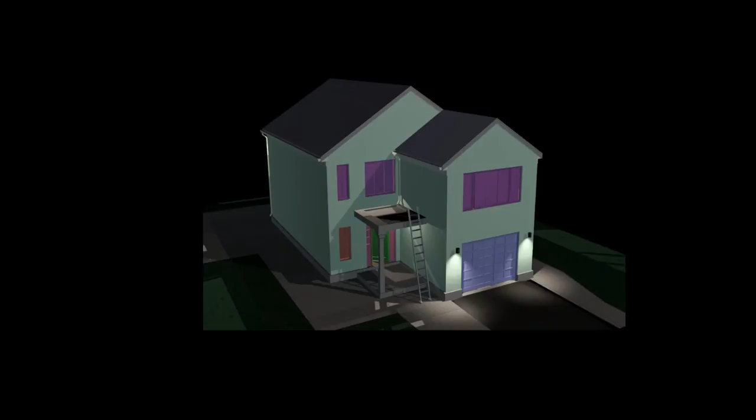Welcome to part 6 of this project. Here we'll do the exterior, the trim, and the gutters.

First, if you have done this with me before, you can hide the brick face and the vinyl siding, so you have only these rafters or the drawings we made previously to create the roof line. So what I'm going to do here is...

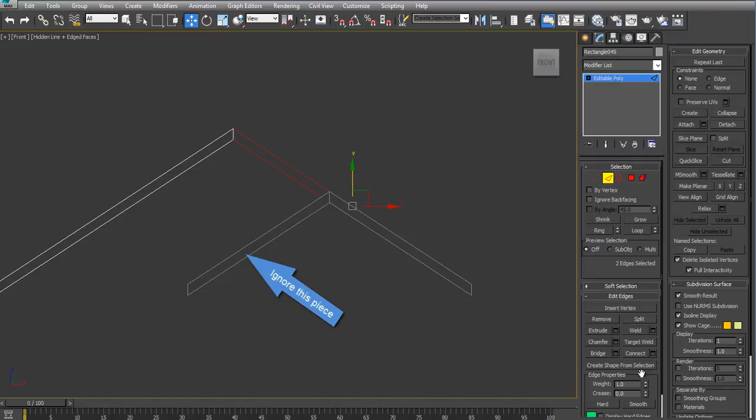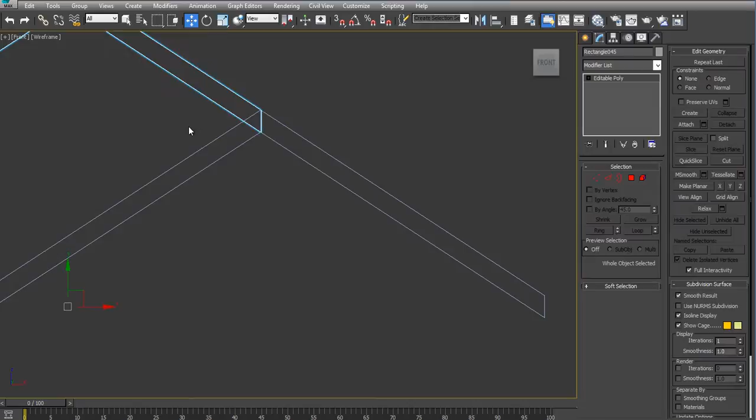I just removed this end from this piece because we don't need it that long. Selecting this, you can just delete that. Now, what we want to do is extrude these faces to about 1 inch.

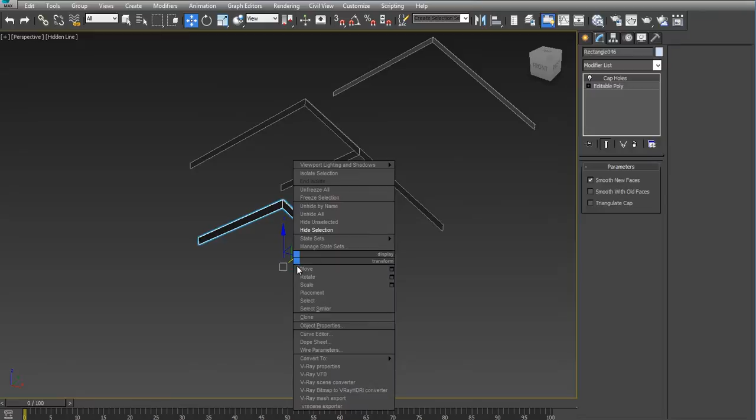So these are the major trim that goes in front of, underneath the roof, in front and the back of the house. Once we have these at 1 inch thick, we can add a couple of lines at the end of each one, converting to poly.

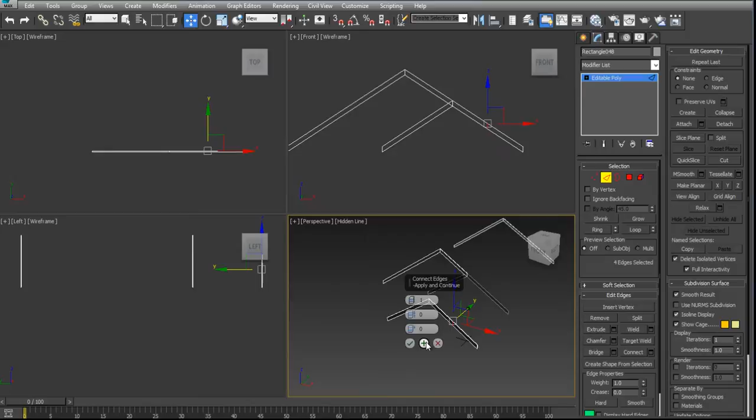I am going to attach them so they all work as one piece. Now, on this one here, you can add a line to the end using connect. That space doesn't have to be too small either, it can be maybe a couple of inches thick.

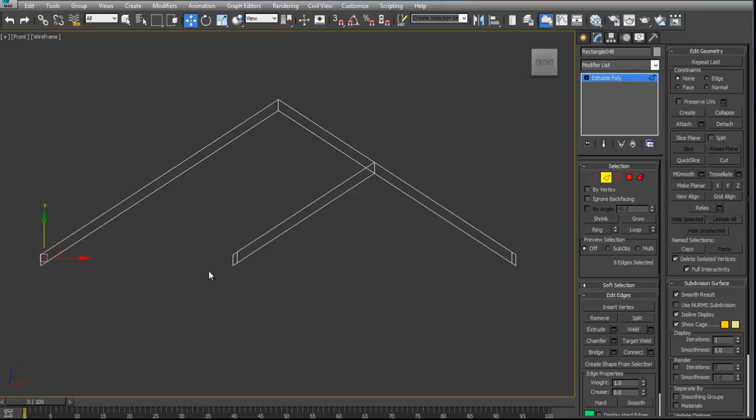So you do the same thing on all the ends. The important thing here is that we're going to use bridge on these ends so we can connect them and create our trim alongside.

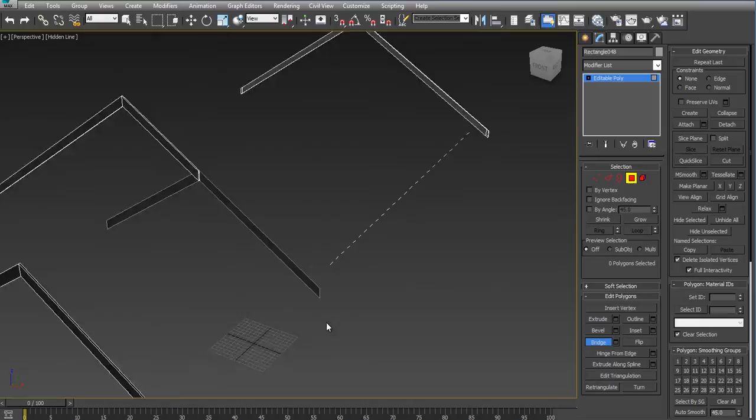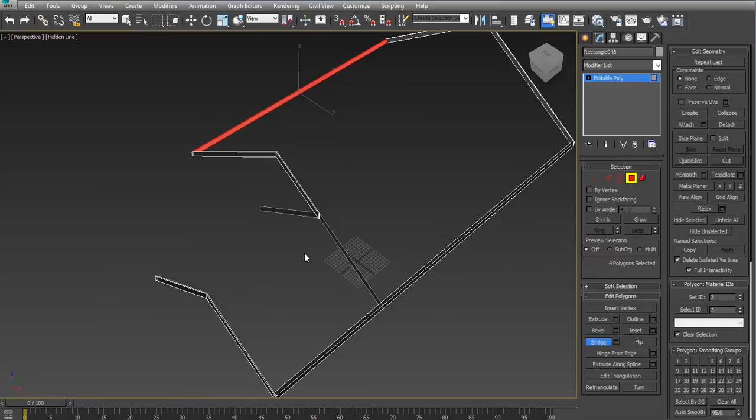So one polygon to the other using bridge, you should have something like this. We do that to all the sides. This one here, you might just want to extrude to about where the other trim is at.

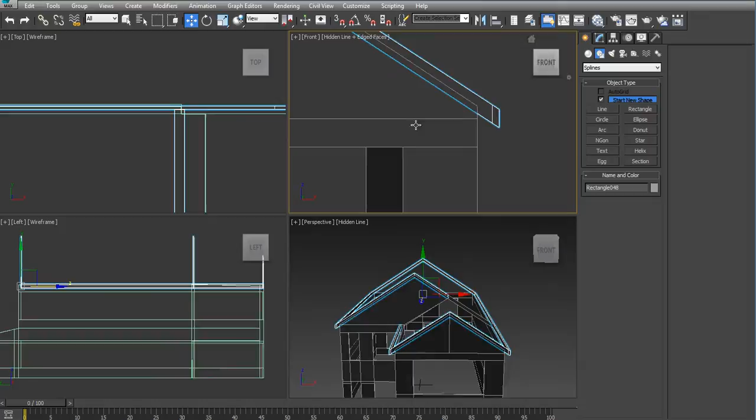Move the trim outside the brick face, and you should do the same thing for all of them. The trim has to be on top of the brick face.

Although I'm not doing it here, for the lower portion of the back of the building, you can also add a small roof in the back in the same manner.

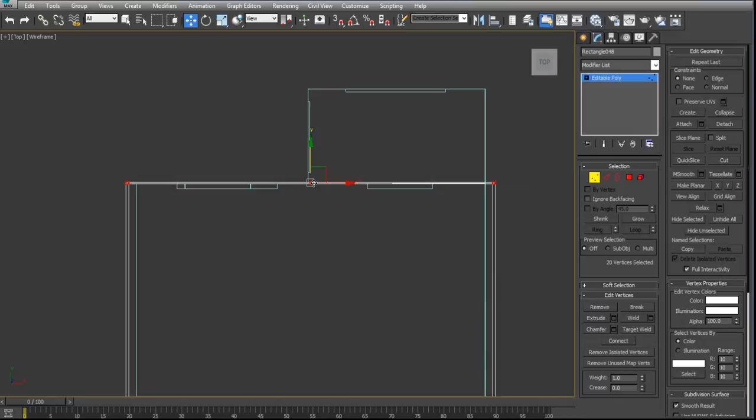Here you're going to draw a triangle about that far into the building, and we are going to use a line to sweep this shape along the side of the house.

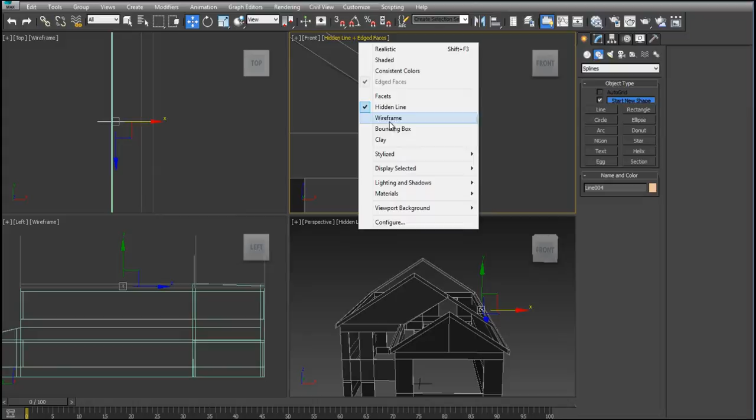I'm going to draw another part of the trim that goes underneath here. This ends at the top of the window height. So these two have to be now swept.

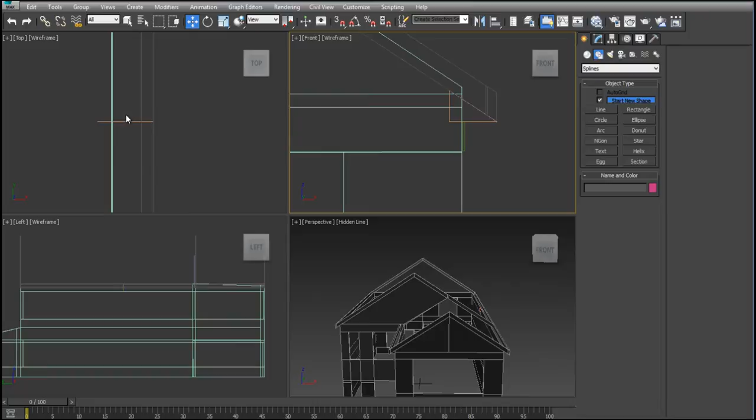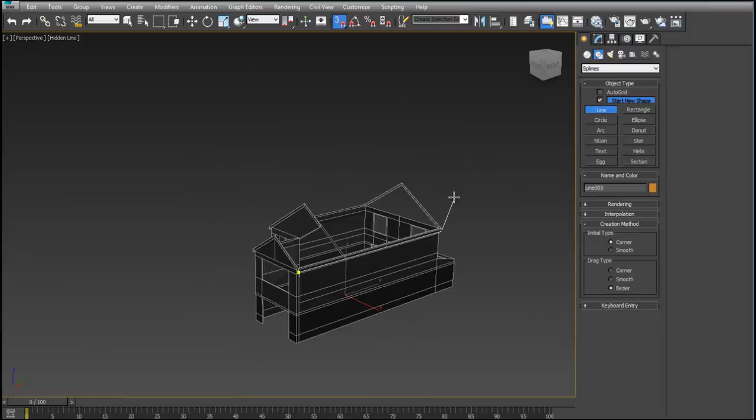Using snaps, make a line about from here to here, and then we can sweep that using the shape of the triangle and the rectangle we made. This way the trim ends up perfectly aligned where we want it.

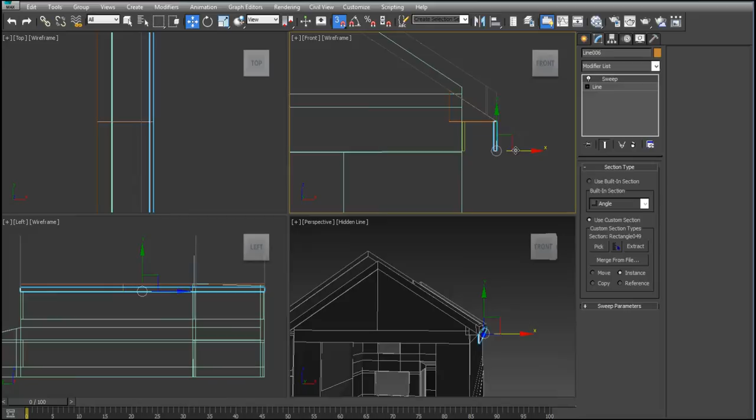We will borrow this, make a copy, and then use a different section, which is this triangle here. This triangle has to be placed back against the vinyl siding. These two are the most important ones, and you can make a copy and place them on the other side of the house as well.

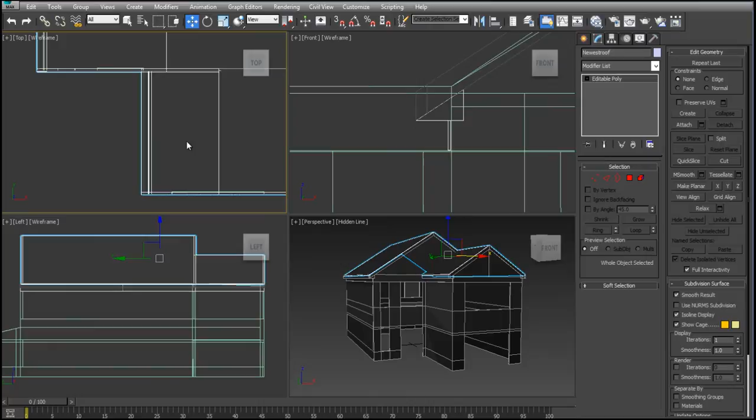Now you can take the roof line and extend the roof past at least an inch past the trim.

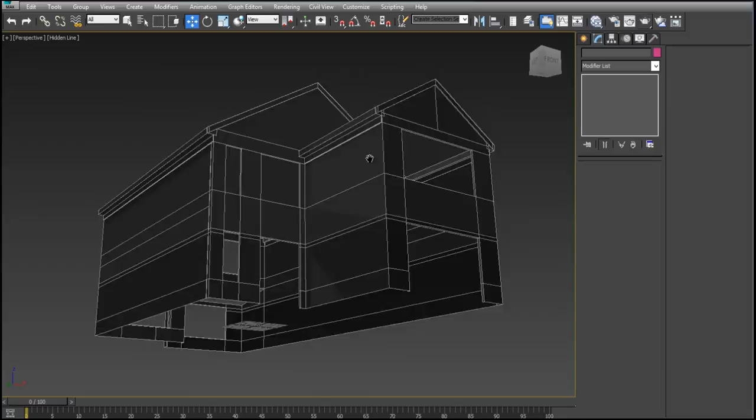That's what it would look like on render. See, in this case, you can't see the underside of the roof. So you can take the roof and extrude to give a little bit of thickness, and I think 1 inch or half an inch is plenty.

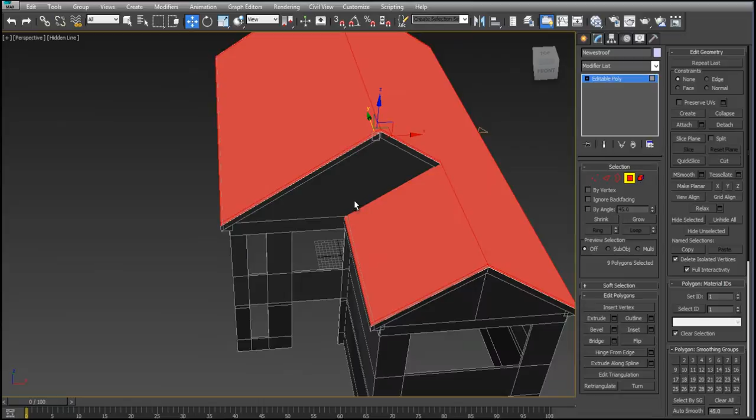Here we're going to draw the gutter. The gutter measures somewhat 3 by 4, depending on what size of gutter you want to use.

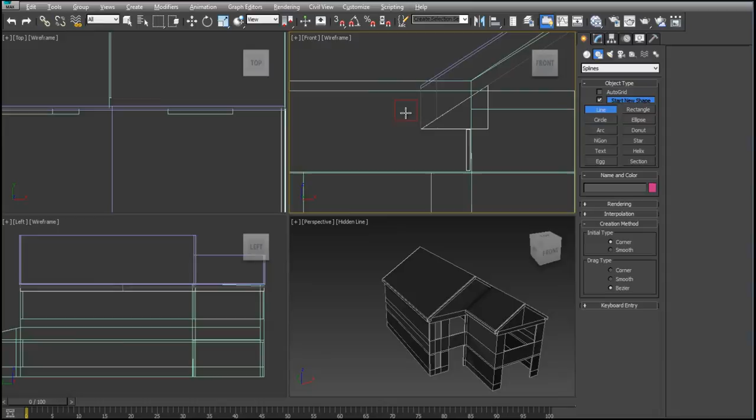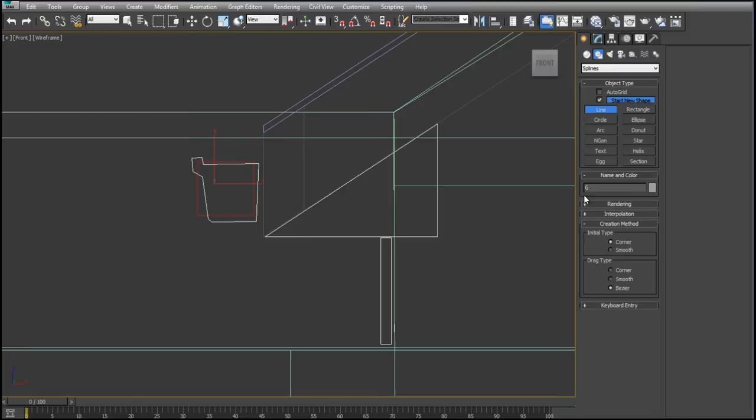So you just draw a profile. You may want to close the profile so you don't have a plane, more like a solid piece.

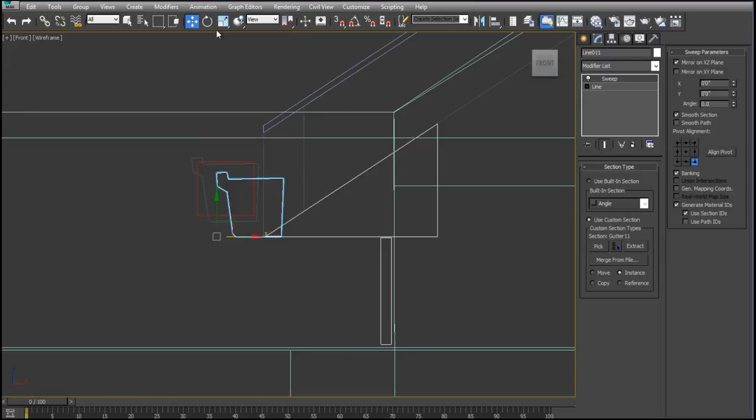We'll borrow a copy of this triangle and change the profile to be used on this one. Just make some adjustments and align it properly, and you have the gutter going to receive the water from the roof.

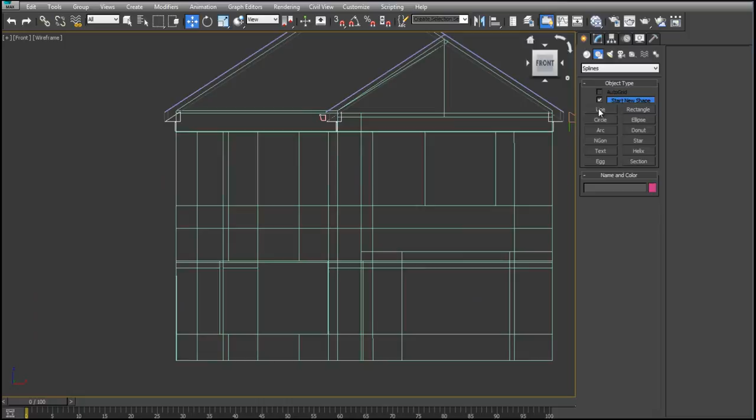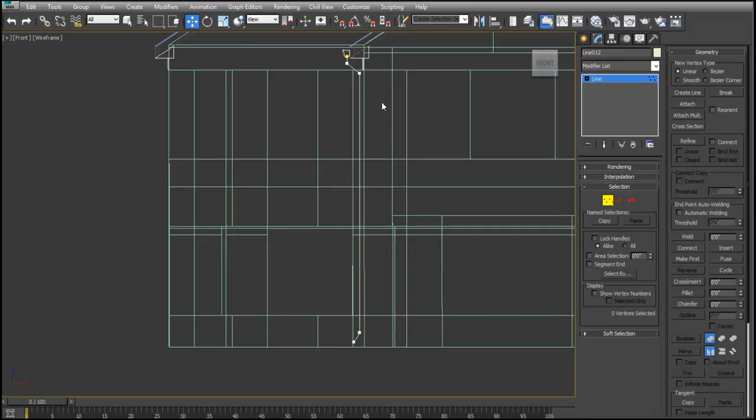You are going to need also a spout. So from the gutter down, you can draw a line like this. It usually goes against the brick siding or the vinyl siding, and it goes outside on a curve. You can make these smooth curves by editing the nodes with fillet.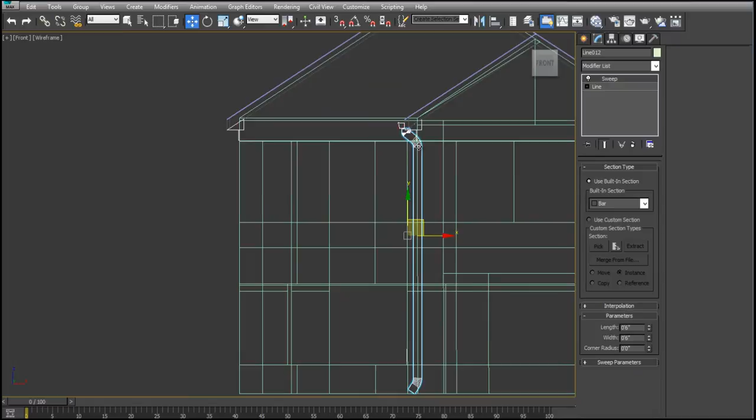Then using sweep, use the shape we just made, or you can use an existing one here. You have a box or a bar called bar, and change the size.

We have 2.5 by 2, and align it, and you're done.

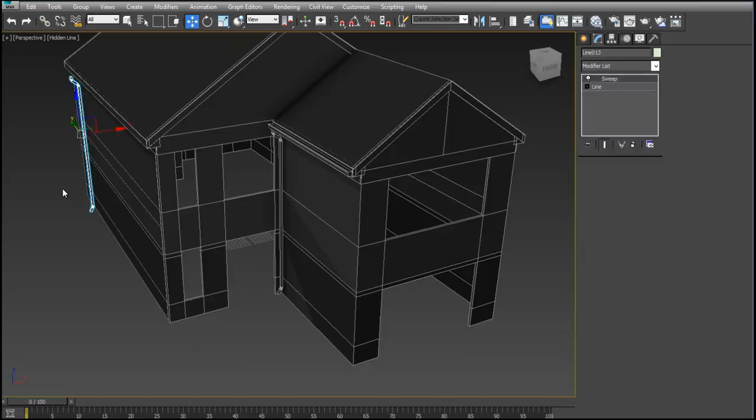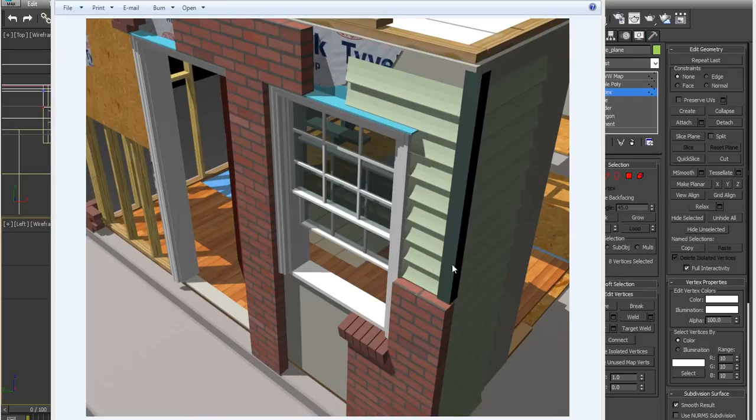Around the windows, there are also other pieces of trim, like this one called brick mold. And around the vinyl siding, you have corners and edges and channels that keep the water from going inside the house. They go around the windows, the doors, and in the corners.

Up on the roof area, you can see them here too, and around the windows. Now, some of these are the same color as the vinyl, and from a distance you won't be able to see them very clearly. So you may not need to draw those channels in some instances, but this is how you would go about it.

You trace the outline of the door frame. Once you have that line, you can sweep a U-channel.

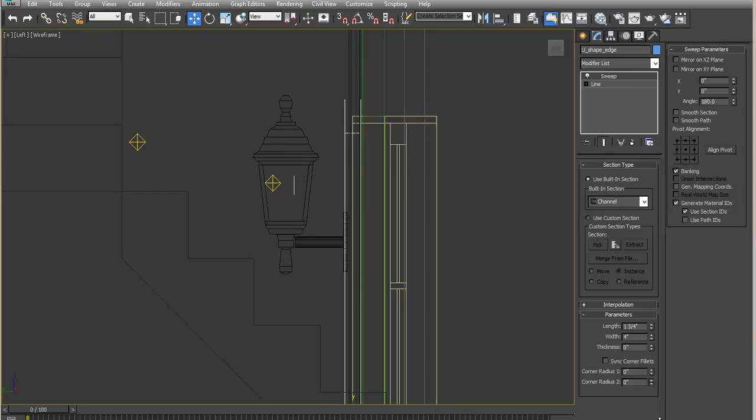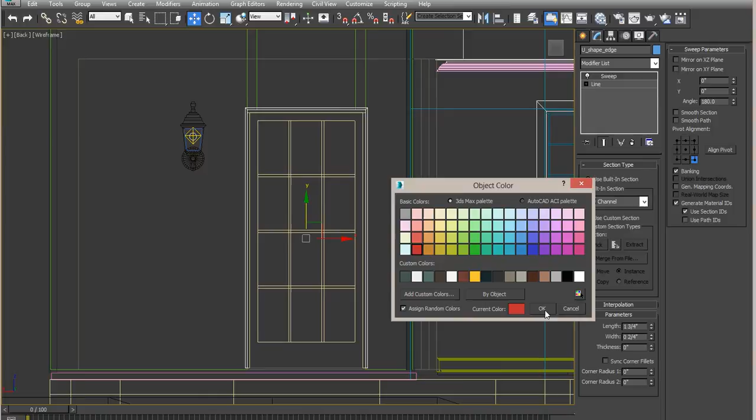Here's an example. After you align it properly and make sure the size is not too large. Here the width is 4 inches, where I'll make it 3/4 inch, and I'll give it a color so you can see it. So when you render, you should see a small channel.

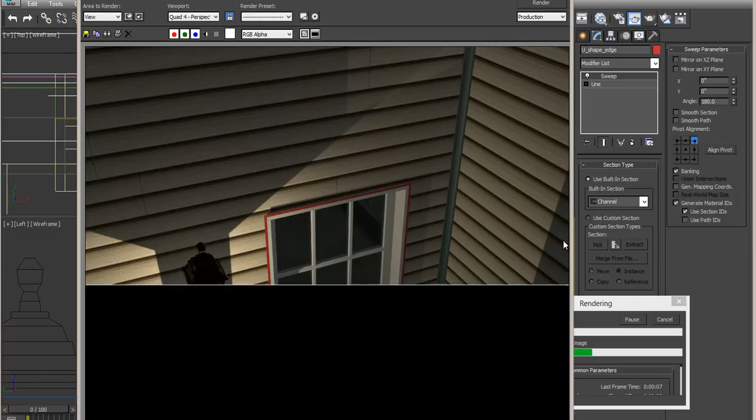That will be perfectly receiving the vinyl siding. Right there, it will be contained right inside the channel. This is minor, like I said, sometimes you can't see that from a distance, but if you're going to use different colors, like in this case, you may as well do it this way.

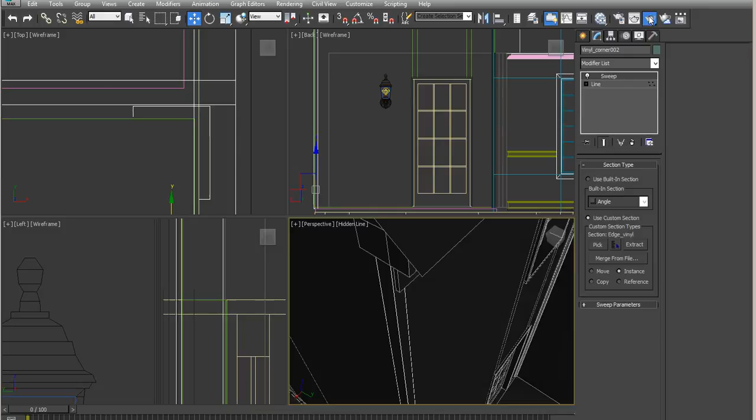So you do that around the windows, around the doors, and on the edges. You can draw your own corner, and the same way, sweep the line so that it fits exactly this way. That's what it looks like on the outside.

The next video is about the materials and maps we use in this project. Thanks.